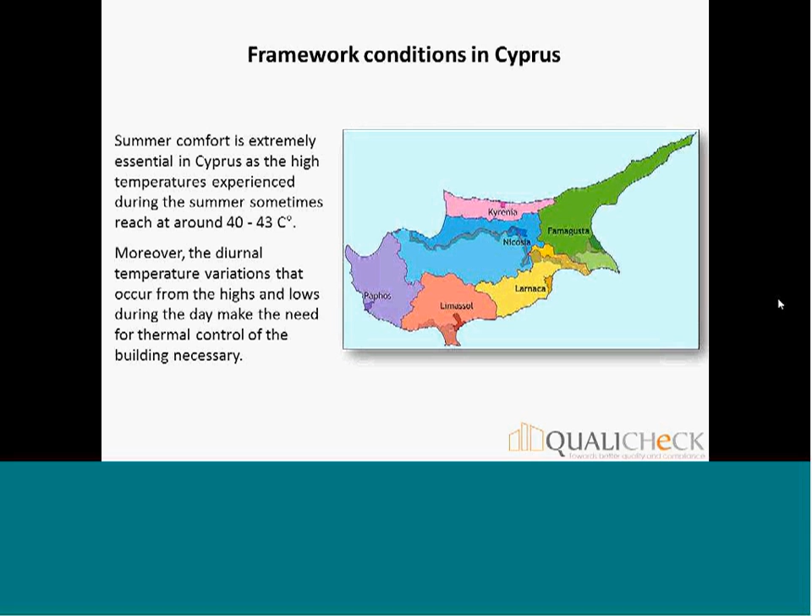Summer comfort in Cyprus is extremely essential, as the high temperatures experienced during the summer sometimes reach around 40 to 43 degrees Celsius. Moreover, there are high diurnal temperature variations that occur from the highs and lows during the day, which make the need for thermal control of the building necessary.

The first national requirements for the U values in Cyprus came into effect in 2007, and the result was that they made the insulation of a building mandatory. Then there was an important revision in 2010, which had as a result the compliance with the maximum average U value and a minimum accepted energy efficiency category, B category, for the energy performance certificate of the buildings.

In 2013, there was a new important revision which imposed new maximum specified U values with 2 new decrees. The result was that the U values of the external walls, columns, and beams had to be equal or lower than 0.72. The U values of the external exposed floors and roofs had to be equal or lower than 0.63.

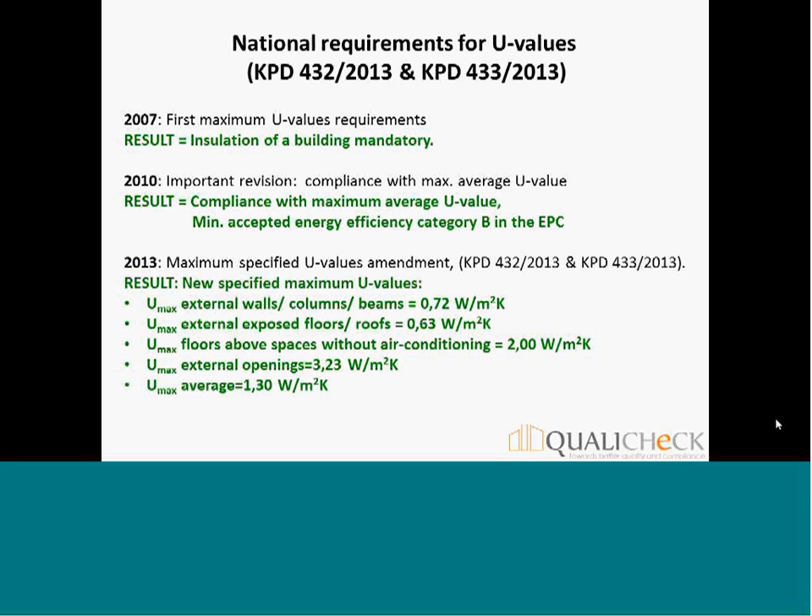The U values for the floors above spaces without air conditioning have to be equal or lower than 2, and the U values for the external openings had to be equal or lower than 3.23. The average U value for the building had to be equal or lower than 1.3.

Non-compliance with input data leads to wrong reporting. Reported U values may vary from actual U values due to various reasons. For example, during energy performance certificate calculations, qualified experts may apply same U values for construction elements with different U values. Or during construction, people may use different products with worse U values than the ones specified during the energy performance certificate calculation of the building.

Or there may be mistakes or omissions of building's elements during construction, which lead to a different U value than the one stated in the energy performance certificate. There also may be missing or unclear definition regarding input data, for example, for windows, doors, and other elements.

And also, although in Cyprus there is a control framework regarding the calculations, as the energy performance certificate with the calculations is submitted to the authorities for building permit, there is no control framework on site. The result is that the reported performance is better than the actual performance.

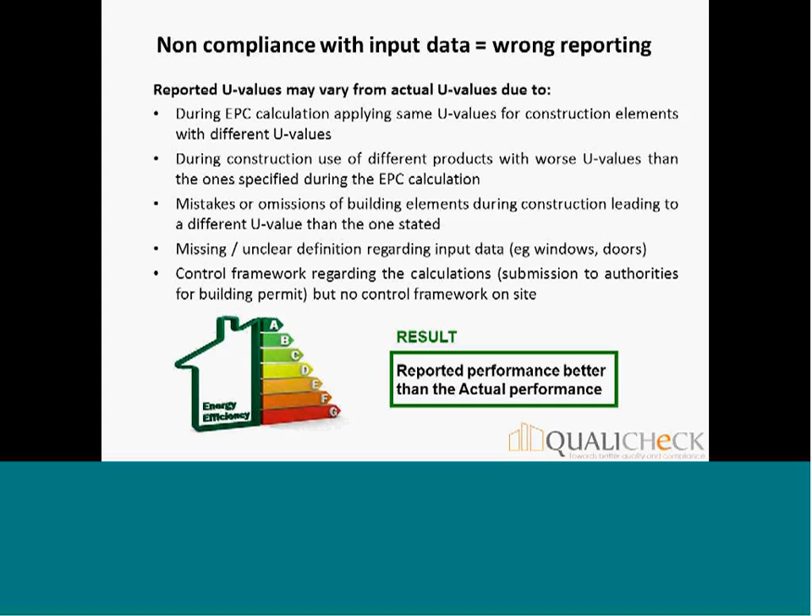The scope and timing of Cyprus new data collection study. In this Cyprus case study, 25 to 30 residential buildings are expected to be studied, and now we have results for 15. They are all newly built buildings, as the need for compliance with the U values applies to newly built buildings. They are well-documented buildings, and they are in different areas of Cyprus.

The targets for the timing of the case study are collection of the relevant information, and on-site visits are expected to be made by 15th of July of 2015. The analysis will be made by the end of July 2015, and the report will be available by then.

The methodology for this case study is collection of information and analysis. There will be collection of design documentation, collection of stated energy performance certificate U values for the shell and frames and the average U value of the building, collection of photographs of the examined buildings during construction phase, and communication with the architect and the tenants to check the actual construction of elements and calculate their U values.

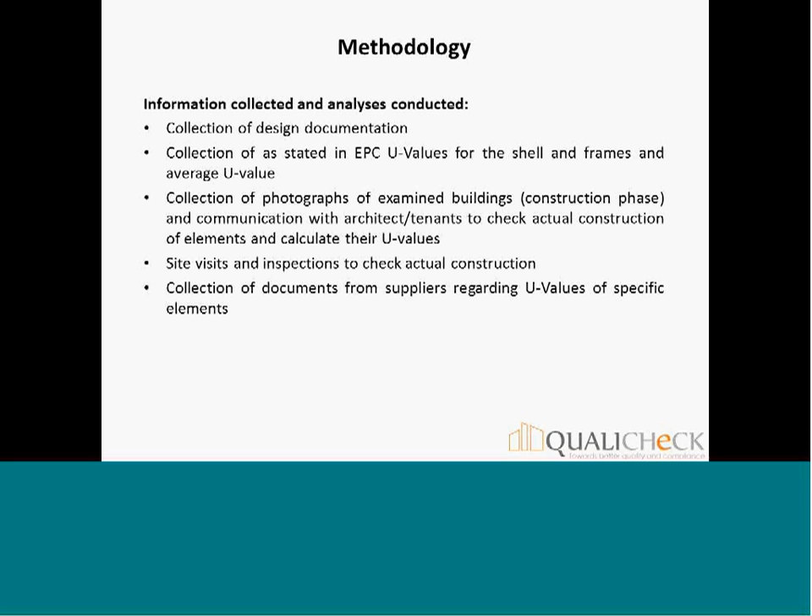There will be site visits and inspections to check actual construction and collection of documents from suppliers regarding U values of specific elements, like windows.

The objectives of the Cyprus New Data Collection Study are to provide answers to the following questions. How well have new requirements regarding maximum U values and maximum average U value been followed both in design and construction? What percentage of the residential buildings from those examined actually comply with those regulations?

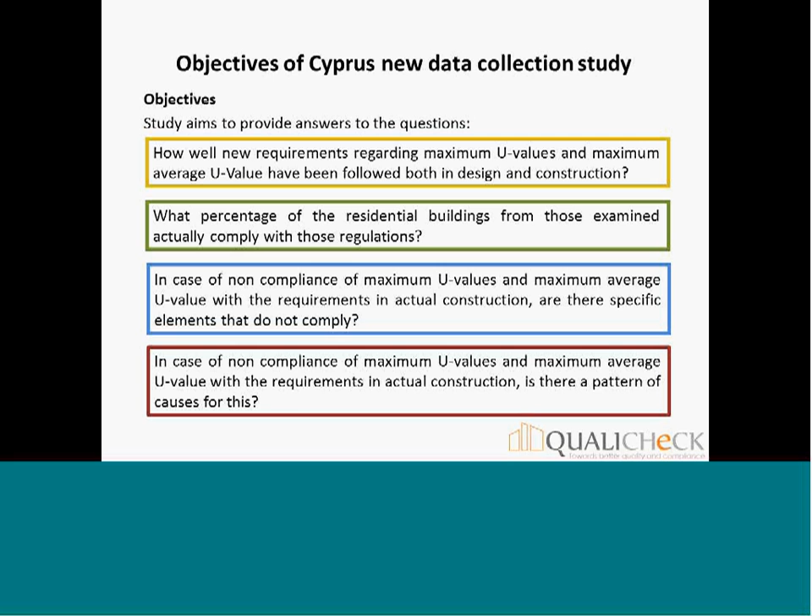In case of non-compliance of maximum U values and maximum average U value with the requirements in actual construction, are there specific elements that do not comply? In case of non-compliance of maximum U values and maximum average U value with the requirements in actual construction, is there a pattern of causes for this?

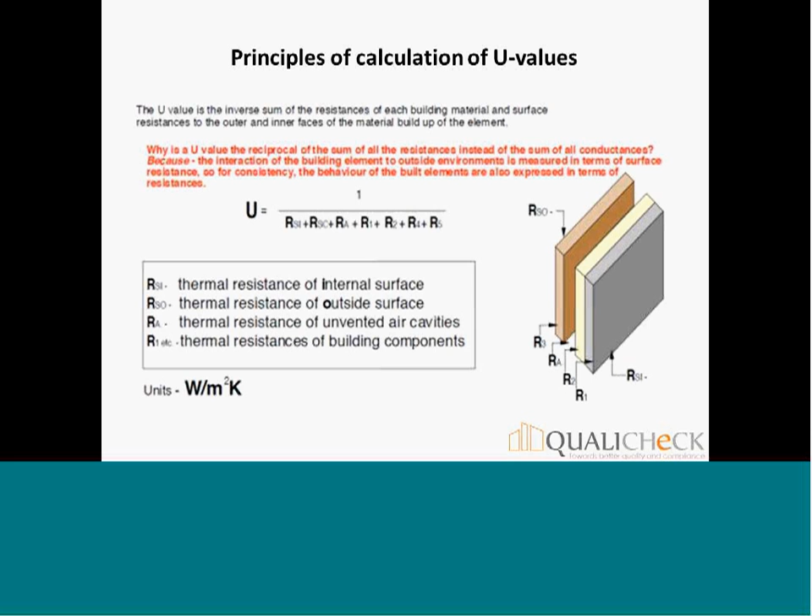The principle of calculation of the U values is that the U value is actually the inverse sum of resistances of each building material and surface resistances to the outer and inner faces of the material built up of the element.

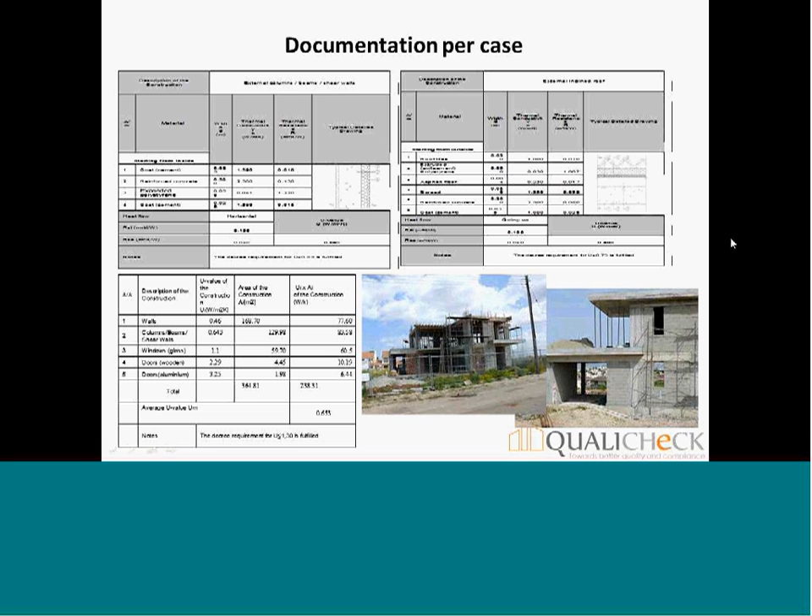The documentation per case that was collected is the U values that were stated in the energy performance certificate of the examined buildings, various photographs, and on-site visits together with statements made by the engineers and the qualified experts. So it's very important to see some of the statements made by the qualified building energy assessors who declined to provide any information regarding either all or some of their energy performance certificate.

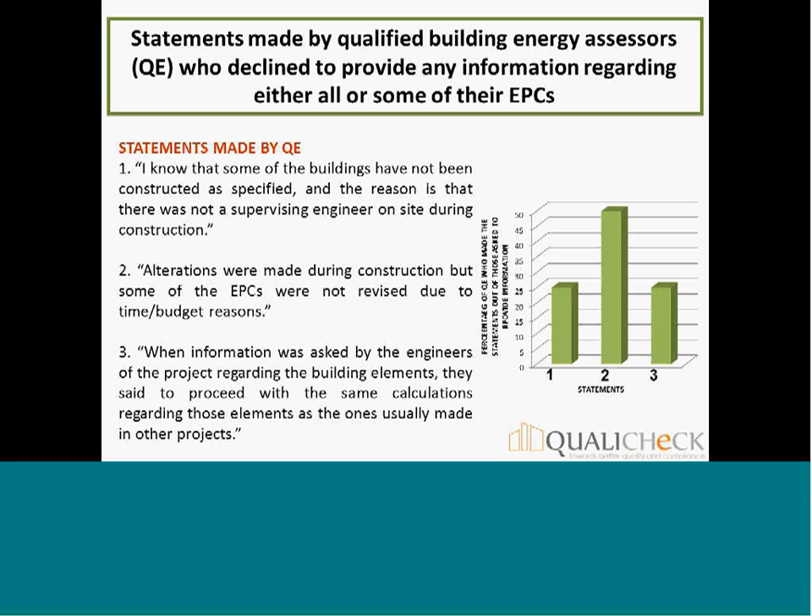I know that some of the buildings have not been constructed as specified, and the reason is that there was not a supervising engineer on site during construction. Alterations were made during construction, but some of the energy performance certificates were not revised due to time and budget reasons. When information was asked by the engineers of the project regarding the building elements, they said to proceed with the same calculations regarding those elements as the ones usually made in other projects.

Now, in the buildings where an energy performance certificate was provided, there are still deviations between the U values calculated in the energy performance certificate and the actual U values. On the left-hand side of the chart, you can see the numbers of projects out of the 15 examined which show the cause. The causes you can see below the chart.

So 11 of the 15 examined buildings showed that one of the causes that the actual U value did not comply with the calculated U value was that there was no reliable input database. 5 of those buildings show that some external elements were not taken into account. Two of the buildings showed that in the energy performance certificate the same U values were applied for construction of different elements.

6 buildings show that there was a different calculation method for the U value of the ground floor than the one specified. And 7 of the buildings show that the decree requirement was not fulfilled. 6 of the buildings show that there were calculation mistakes during their energy performance certificate calculation of the U value.

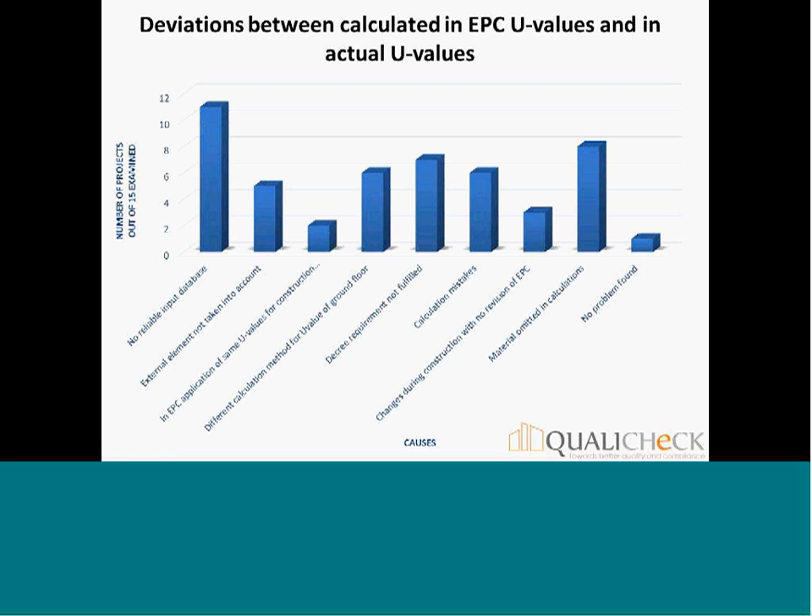3 buildings showed that there were changes during construction, but there was no revision of the energy performance certificate and its calculations. 8 of the buildings showed that a material was omitted in the calculations, and only in one of the 15 buildings, no problem was found.

So coming back to the questions that we asked before, starting with the first question: how well have new requirements regarding maximum U values and maximum average U value been followed both in design and construction? The preliminary answer that we found is that only in specific construction elements in 7 out of the 15 examined residential buildings, they have not been integrated. What percentage of the residential buildings from those examined comply with those regulations? We found that only 63% of the examined buildings fully comply.

In cases of non-compliance of maximum U values and maximum average U value with the requirements in actual construction, are there specific elements that do not comply? We found that the elements that do not comply are the exposed floor slabs that are not taken into account by the qualified experts, and the external openings.

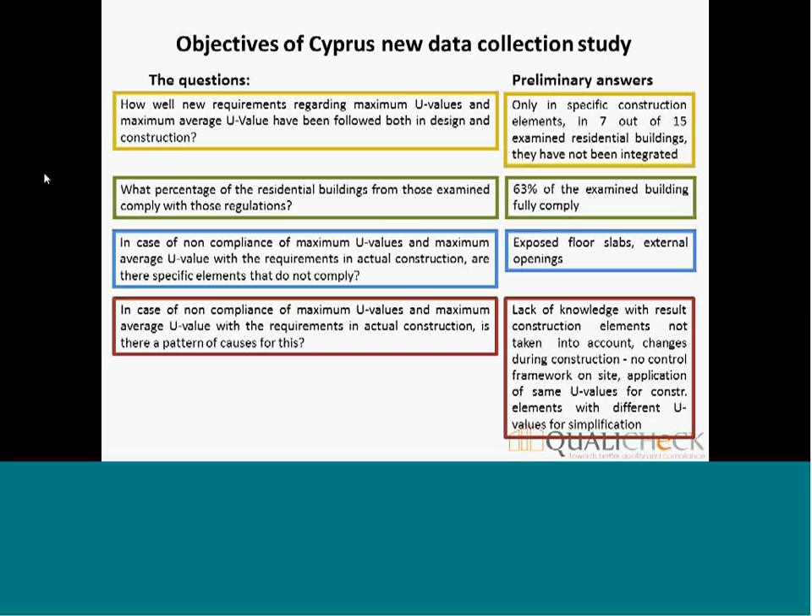In case of non-compliance with maximum U values and maximum average U value with the requirements in actual construction, is there a pattern of causes for this? We found, talking to the qualified experts, that the causes for this are lack of knowledge, with the result that construction elements are not taken into account; changes during construction, as there is no control framework on site, and the energy performance certificate is not revised due to time and budget reasons; and that qualified experts apply the same U values for construction elements with different U values for simplification reasons.

So the conclusions until now are that requested information was not provided by qualified experts when we asked for energy performance certificate information. And the main reason reported by them is that the energy performance certificate U values vary from actual U values. And the causes are lack of a supervising engineer on site, alterations made during construction without the relevant revision of the energy performance certificate due to time and budget reasons, and an engineer giving wrong and/or deficient information to qualified experts due to lack of knowledge or appreciation of the value of the energy performance certificate.

Even in the 15 examined residential buildings where information was provided by qualified experts, which are the best cases, there are still deviations between reported and actual U values, which sometimes are not so important, for example, construction elements like the cement being omitted during calculation, but which sometimes are very important, for example, no reliable input data, construction elements like a whole exposed slab or single glazed windows being omitted, and changes during construction without the relevant energy performance revision. So this was a short overview of the case study for Cyprus.